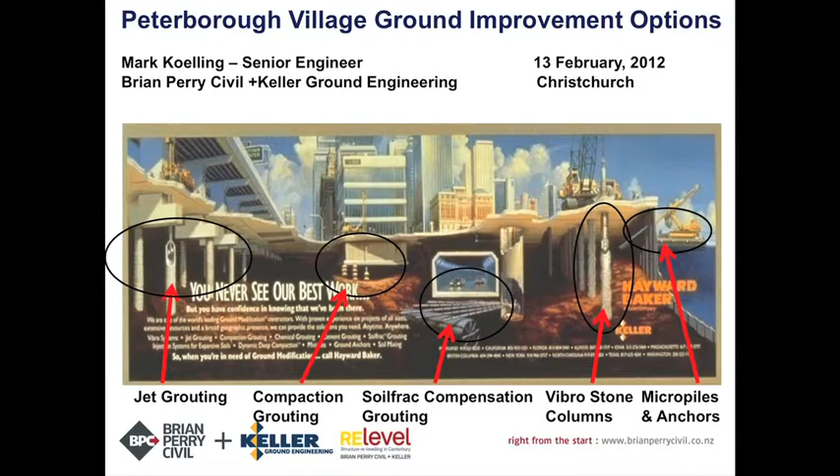In looking at the underground, I'll just move through some systems here, names you may have heard of: jet grouting, compaction grouting, compensation grouting, vibro work with vibro-compaction and stone columns, micro piles and anchors. Obviously all these don't have a part to play in Peterborough, but somewhere they might in greater Canterbury. I'm with Keller. We're in joint venture with Brian Perry here in New Zealand. We're trading as Relevel to use compaction grouting to lift and level, but this is about seismic mitigation, so that's where we'll keep it.

The methods, I won't go through all of these, but just to make the point that there are many, many methods in the industry that address the soft side or the cohesive soils as apart from the granular soils. Your soil profiles here, which have been highlighted this morning and discussed, it's a bit of granular and it's a bit of cohesive. So from a ground mechanism standpoint, we're looking to densify the sands, the cleaner granular soils, as well as to reinforce the siltier range of sands and the silts.

So for us, it's somewhere between densification and reinforcement to mitigate seismic liquefaction, pick up your bearing, reduce either static or seismic settlements. We'll get down here quickly to talk just a bit about soil and mass mixing, some stone columns, speak briefly to wick drainage. We use both wicks and earthquake drains for drainage enhancement as we do the vibro work.

Over excavation is your cheapest way to go. If you can get a meter and a half of poor soils out without being affected by your water table, you put compacted fill back in, reinforce your mat, maybe put some contingency in to lift and level after the next earthquake, and that might handle a lot of your problems at Peterborough. Cheapest way to go. Over-ex, put in a good raft, maybe with some contingency to relift.

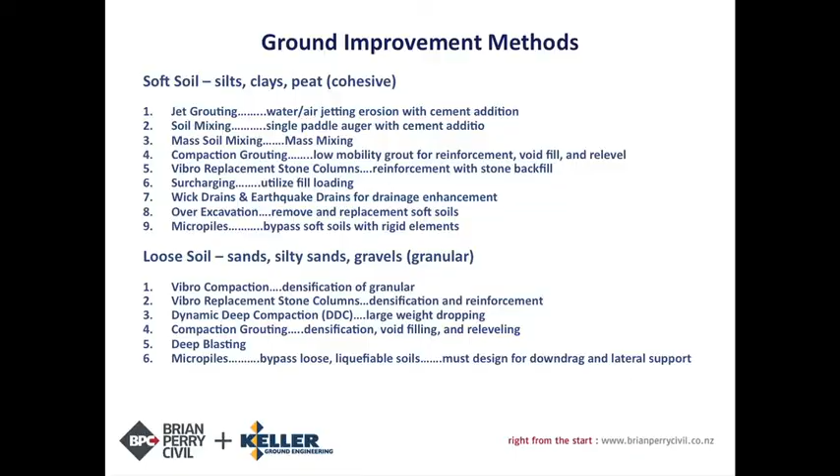The loose soils we're after with densification, vibration. I won't speak to micropiles. I did put that in there, but piling's been discussed. Piling could be the answer to a lot of Peterborough as long as two things are taken care of, and those have been highlighted this morning. Your down drag under the earthquake and also the lateral support to the pile, meaning that you've got to have something there after the earthquake, which a couple of the gentlemen have spoken to. Deep blasting, I don't think anybody wants to do that too much, and some of these other names.

For the new sites, we'll quickly go through the vibrators. A bit of weight dropping. I don't think the CBD wants big weights dropping, but I did want to show just a couple of slides on what might be used in Canterbury. Soil mixing, and I won't speak to piling, which has been covered a bit, and other folks here are available to speak more to piling.

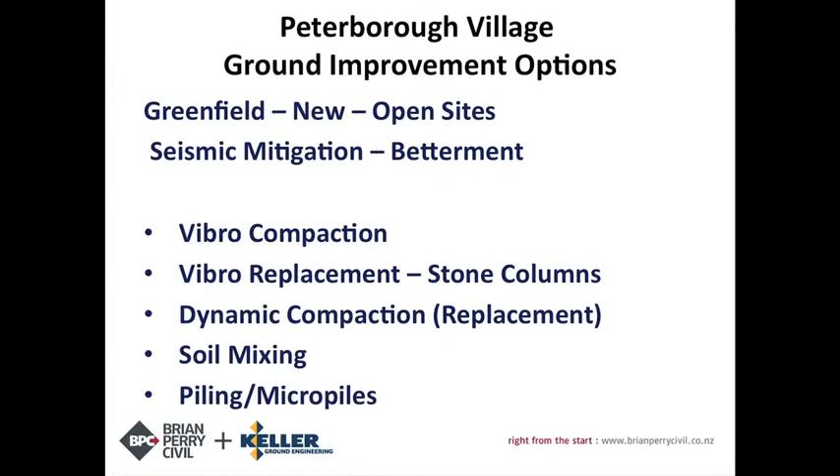The downhole vibrator offers densification and reinforcement. Keller uses electric motors, which spin a bob weight down here in the nose, and you get a steady state pulsation in the ground, about 3/4, about 20 mil of amplitude, which is a steady state vibration. As the vibrator penetrates, it takes the clean sands down with it and densifies them, makes them more compact.

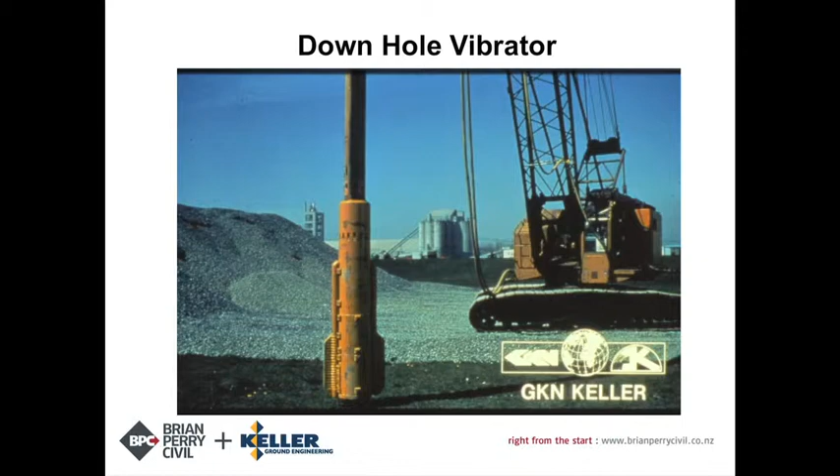Where the soils don't densify, we're putting stone in the ground for a better shear strength element. We use water conventionally, but we also have a dry system that's hooked up to an air compressor where we take water flushing out of the system and use air flushing. The system goes back to the 30s.

In Germany, the first vibrators were designed and built to densify sands. You go into loose sands and you open up a hole. And you fill in the open hole with either a stockpile or you blade the site down. This is called Vibro-compaction. It's for clean sands. That's not what you've got here. You've got interbedded sands with silts.

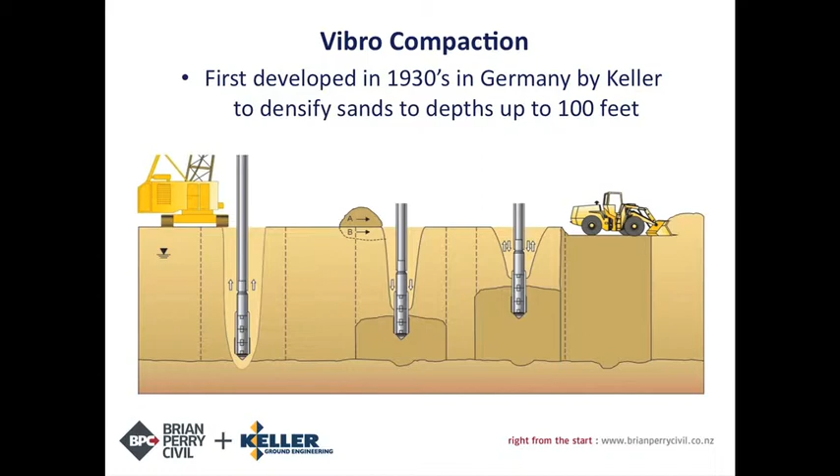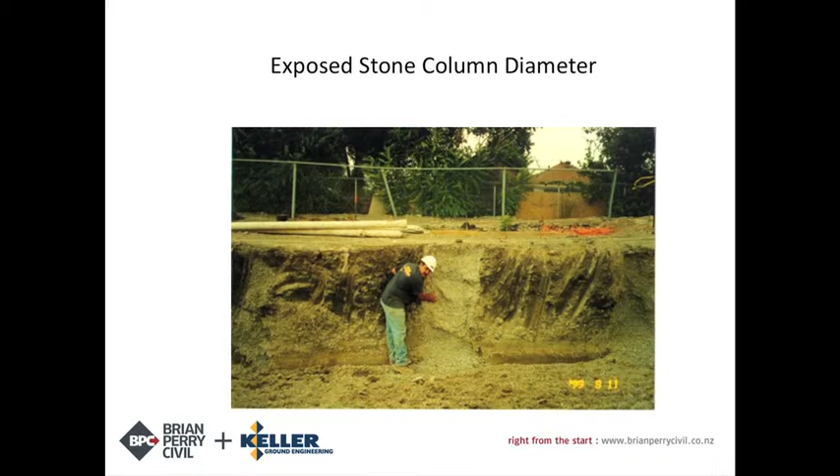So we're after putting stone in the ground. We deal with diameters that are on the order of 600 to 1200 mil, and we're after three mechanisms. We're after densifying any clean sands. We're after reinforcing the silty sands and the silts with a better shear strength element, and we're looking for drainage. Okay? Densification, reinforcement, and drainage.

This is work just completed at St. Andrews. It's Tony's work with Tonkin and Taylor. Stone columns were put in with a dry bottom feed system. This is not with water. This is with air compressor work to come up with a meter diameter. And then it's carved down a bit with geogrids and shingle placed on top for the concrete raft.

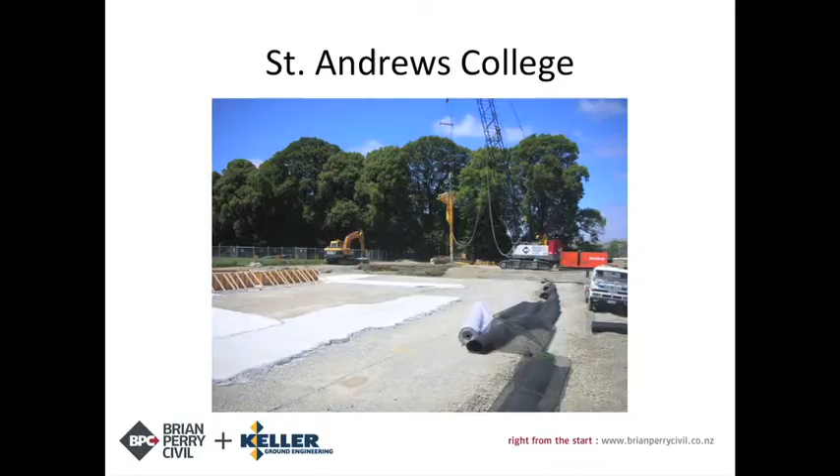Another tool that's available, we're using this in Auckland at the moment, it's called a Vibro-cat. It's simply a purpose-built track machine with the same vibrator working, allowing us to take a bucket of stone up to the top and the stone feeds out at the bottom. So the vibrator works up and down as the stone's being placed to compact the column and to drive it out into the soil to create larger diameters.

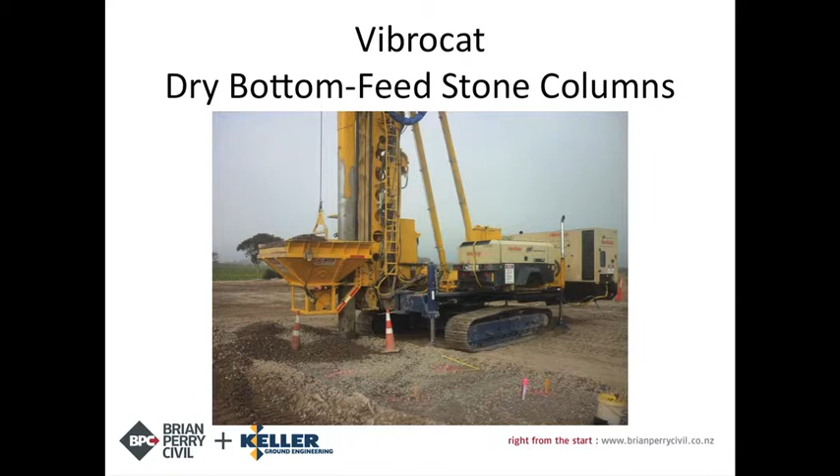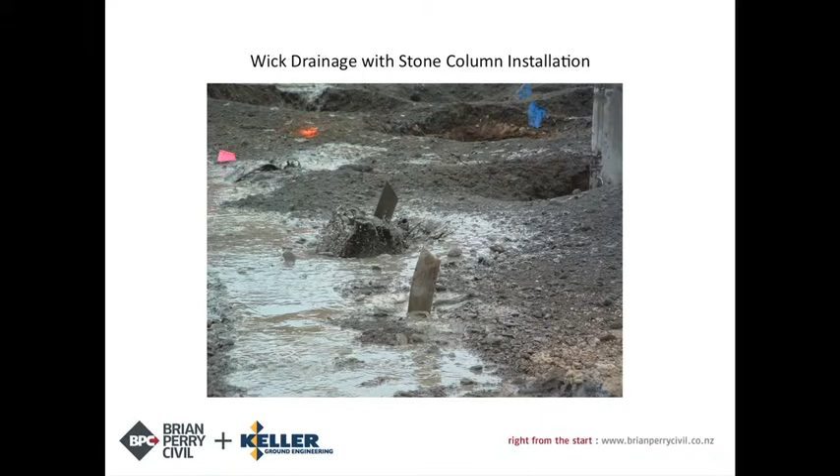Simon Woodward asked me a bit about drainage this morning. We use wick drains and earthquake drains to enhance our stone column work in the States. We don't look at drainage only. Other folks here might have other thoughts, but with the instantaneous nature of the ground in these earthquakes trying to give up water, I would not agree with drainage only.

What you're seeing here is we placed wick drains first. The vibrator is working second to install the stone columns, and we're driving water out. Taking water out of the soil is a form of ground improvement. And what we're doing here is to enhance the densification of the siltier range of sands by getting water out of them as we're placing the stone.

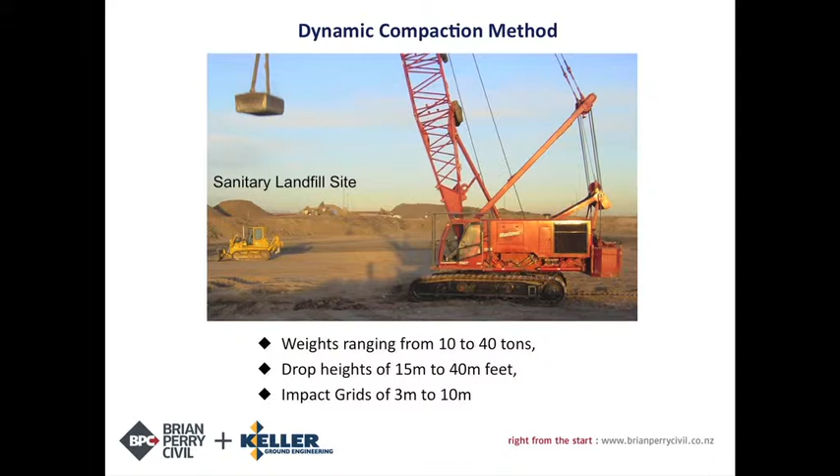I'll be brief here. We're not going to do this in Peterborough, but weight dropping might work with 5 tons. We use up to 40 tons in the States a lot. There is a bit of method to the madness. You've got to keep a crane together and you've got to know how many times to drop something. The point I want to make here is that there's a dynamic replacement method available that if you place stone or busted up recycled concrete across your site, if you don't have off-site vibration problems, meaning you don't make your neighbors angry, you can drive the stone to 4, 5, 6 meters down in some soil conditions.

Work has to be done significantly above the water table, meaning you don't want to drop into a swimming pool, but if you can manage the water table, stay above it, and drive stone into poor soils, you can replace them to depths of 3, 4, 5 meters.

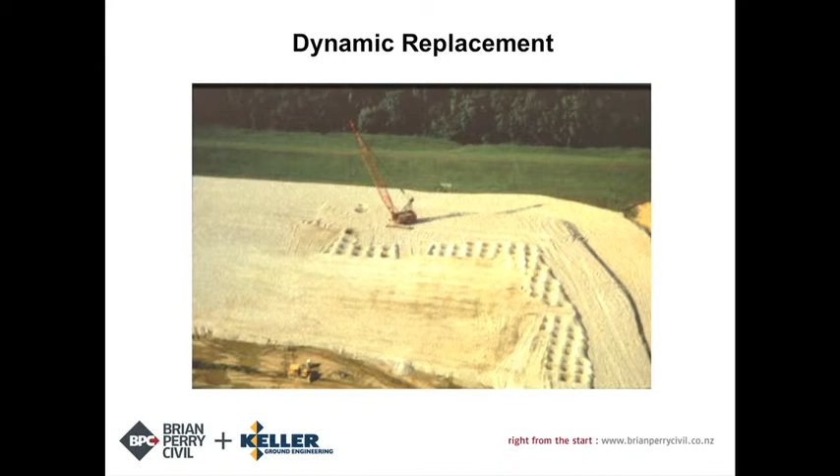When I first got here, I thought this would be great for new subdivisions and all of the recycled concrete available. This is work in Newcastle, a large coal loading facility. You see a couple different size weights that are simply driving the stone into the soil to displace the soil. The craters are created. We dump more stone in and continue the process to get displacement in soft soils. It's a replacement mechanism.

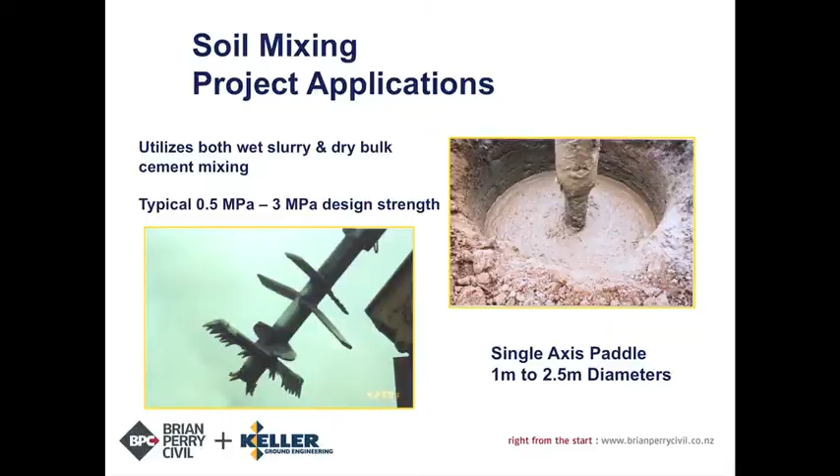Soil mixing is done with specially built paddle augers. We put in either a wet slurry or a dry bulk cement in order to create columns or secant-placed elements. It's pricier than some of the other methods. I point it out here because for lateral spread, it might be a player in Canterbury, possibly not Peterborough.

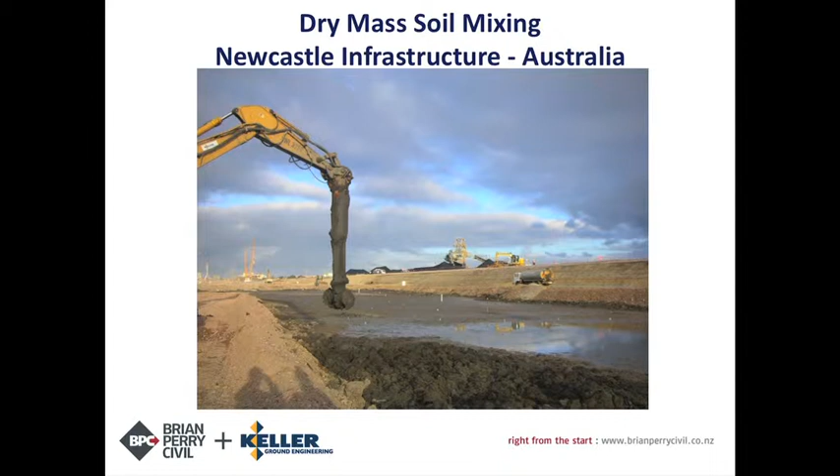Mass mixing is a dry bulk placement through an arm such as this on an excavator in which it goes out to claw the soft soil and to inject a bulk dry cement. The question this morning was about peats, and I said we would address it with dry cement. A lot of dry and wet mixing as well as jet grouting has been done in southern Louisiana since Katrina and the issues with the hurricanes, in which reinforcement or retrofitting of levees has been necessary.

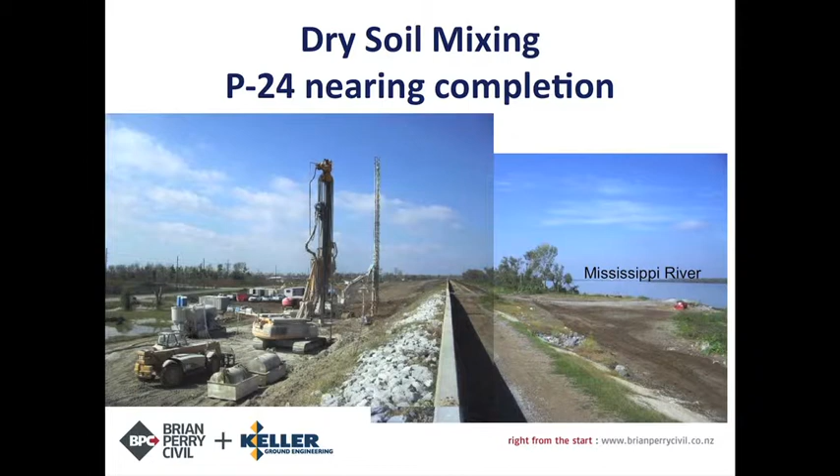What you see here is about a 600-800 mil diameter paddle, same as the wet mixing tool, but we're putting dry to it. And we treat a lot of peats and organic silts with soil mixing, particularly dry. There is a subtlety to it that the cement needs to hydrate.

So necessary here is a baseline study with the peat to make sure the cement hydrates and you get your design strengths. Most of the work I've been involved with, no issue. One recently before I left the States, got nothing for strength. The peat composition did not allow the cement to hydrate.

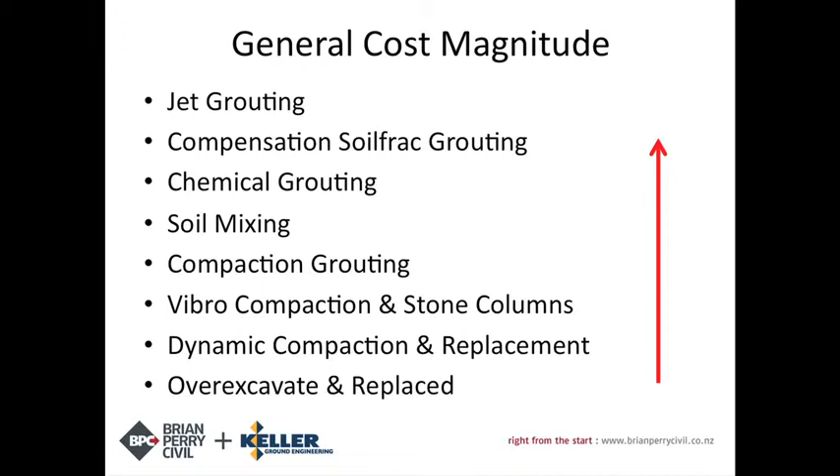Soil mixing, chemical grouting I didn't speak to, nor soil frac, and jet grouting's a bit more expensive yet. But that's the way the costs lie, and I appreciate your time.

Any questions, Mark? Yes, sir. Compaction, you said that when you first arrived, you thought that would be a good one, but you've changed your mind. My point is that when I first arrived, I had other thoughts than what I have today. It all has to do with insurance money and what new developers want to spend.

I mean, the methods will play out with respect to how much money is to be spent on a retrofit or a new structure, and that limits it. My point here is that there are methods available in the industry being used every day somewhere in the world that can address your soil conditions. The money may not play. And yes, my thoughts have changed as to what I might be able to get done here.

But the dynamic compaction, the water tables are too high in general. In order to get good weight dropping work done, you want to be at least 2 or 3 meters above the water table. So with respect to a new subdivision here, if this was a player and the water table was 1 meter down, you would probably want to put another meter of fill in over the site so that we're working at least 2 or 3 meters above the water table to get a big weight working like I showed you here.

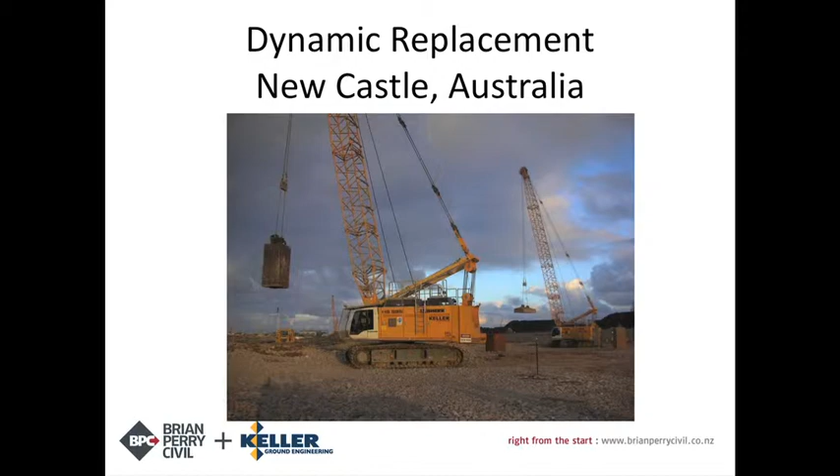Yes, sir. The stone column idea, how effective is that when you've got layers of peat? It becomes a design issue as to what strength you get from the confining soils. Meaning you put stone into peanut butter, the stone could move sideways into peats and poor soils. So if you can't reinforce that very soft soil without keeping the stone where you want it, then you go to other methods to get more rigidity with cement.

So we try to get to that fine line where the stone is giving you value in soft soil and where you've got not enough confining stress laterally to keep the stone where it needs to be. So yeah.

Deep soil mixing's been done a bit in Auckland. It's very good for stopping lateral spreading. Is there any kit in New Zealand that's able to do that at the moment? Like, any kit, the mass mixing or the individual columns? Either. Yes, mass mixing and column soil mixing is available in New Zealand, either by some of my other friends or from our kit out of Sydney.